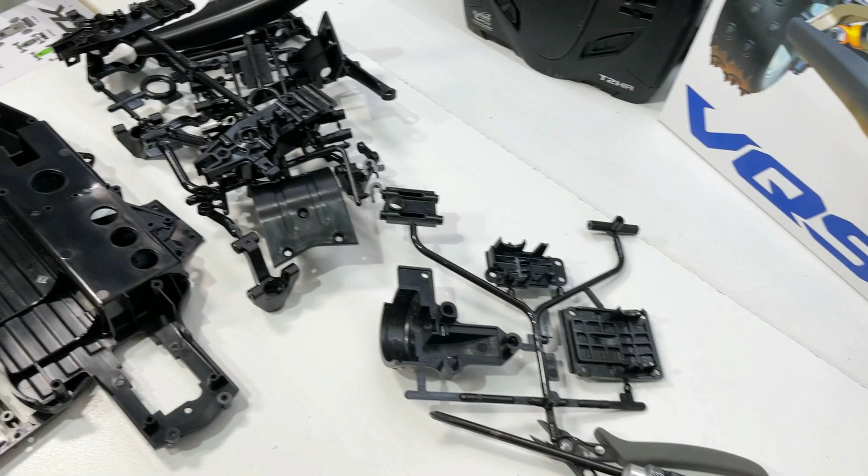Alrighty, so we got the VQS all unboxed there, got all the parts laid out, and I'll put the bags in separate tubs with the A, B, C, D on the front.

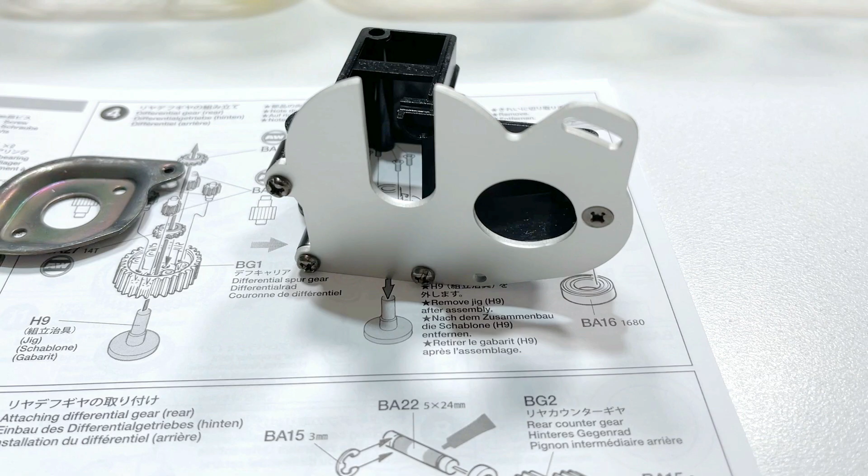So on to step one, we get to put the motor plate on. And there he is, just a few screws, too easy.

Now we're onto the motor. Got a bit of a decision to make - will I use the super stock TZ motor or the super stock RZ? I think I'll go with the RZ. Why, I hear you ask? Because it's going to match the red stickers on the car.

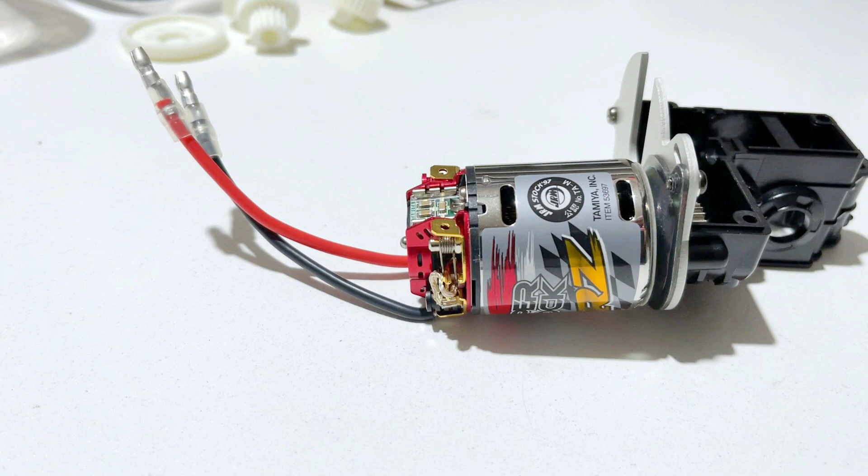Now the super stock RZ motor's all installed, looking very sexy. And we can get on to putting some gears in.

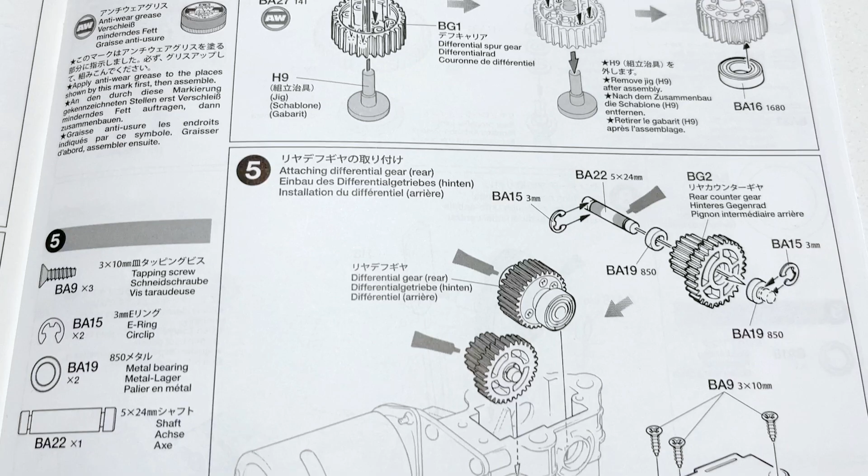So in step 4 we start with the rear diff. That's all pretty simple, and then move on to the counter gear and stuff, and the output shaft, or propeller joint.

Now in step 7, when you're building the center diff, you got to be real careful of these washers. Make sure they're all installed the right way. Basically they act like a spring, and of course they won't do that if they're not put in the right way.

And as you can see here, I've got the center diff in, and the diff gear and counter gear, just waiting on the bevel gear.

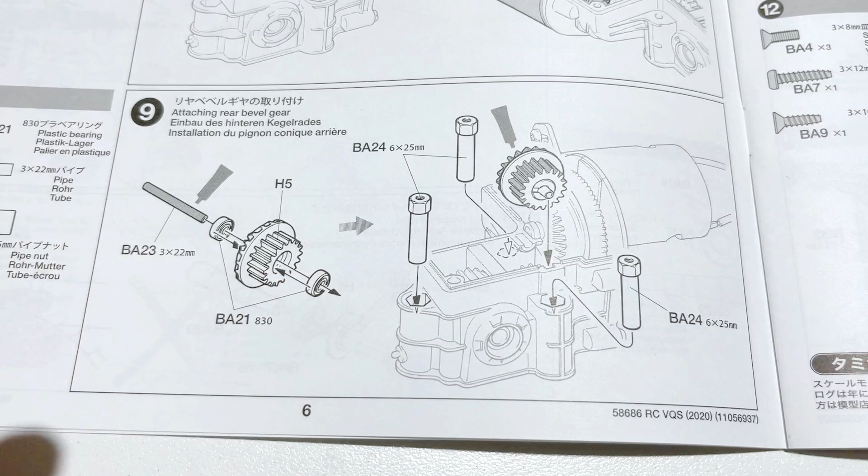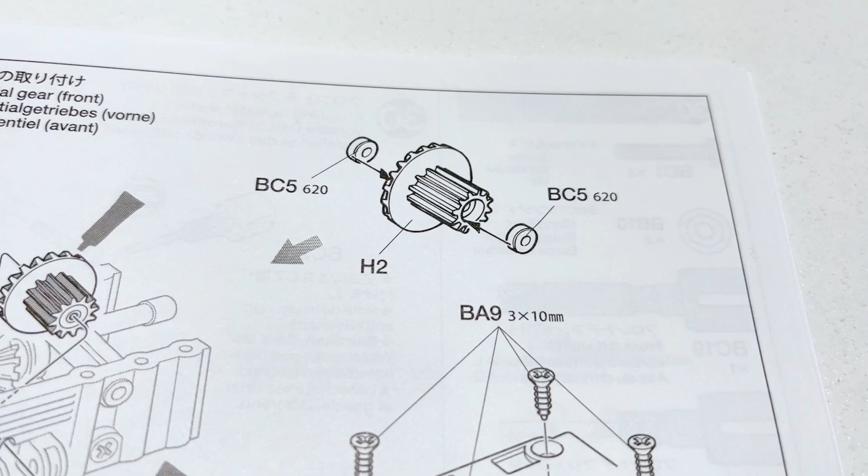Now moving on to the bevel gears. As you can see, I need these little 830 bearings to replace these plastic bushings. I didn't have them, and on the front bevel gear I didn't have the little 620 bearings, even smaller, for the front bevel gear. So I had to go and order them.

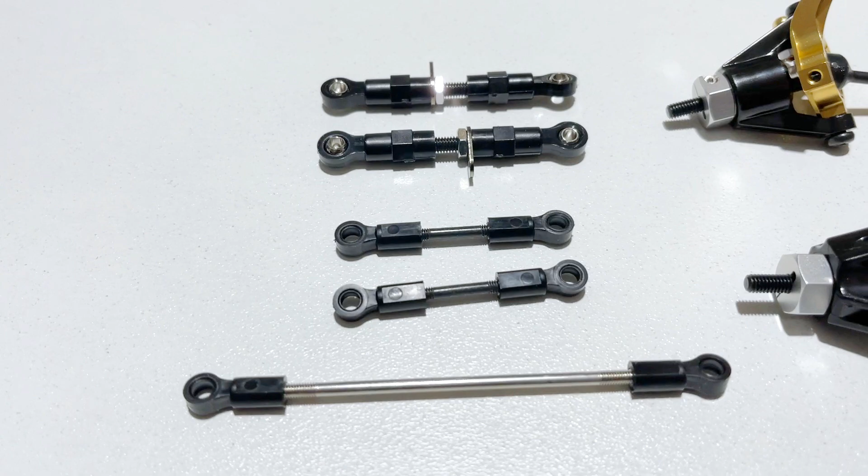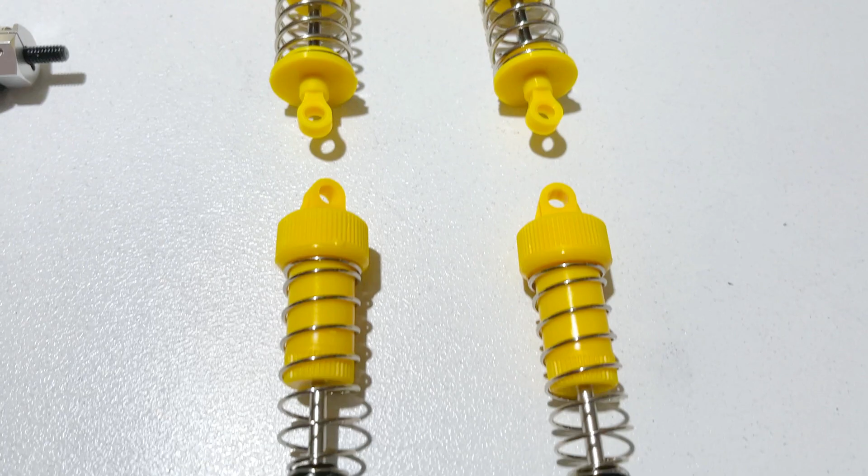Now while I waited for the bearings to arrive, I got onto the steering links and tie rods and things like that, and the rear arms, then the G11 part with the stabiliser on, also the steering and the gearbox cover there. Then I assembled all 4 CVDs and assembled the rear hubs and the front hubs, and then assembled all the CVA shocks. Alrighty, now the whole rear end's all assembled, got the shocks on and the bumper and everything. Now we can get onto the front gearbox.

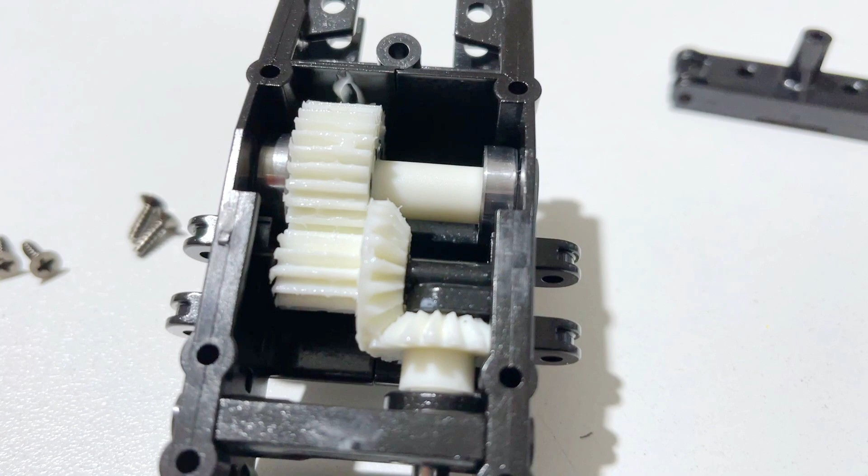So I've got the bevel gear in there, using the little 620 bearings.

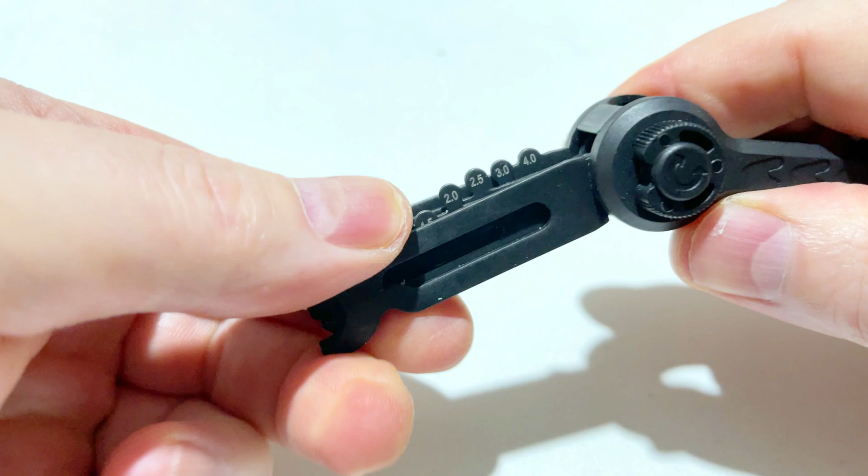Now it's time to put the front arms on, so I'll show you this little tool - it's going to be handy for the E-rings, little Dynamite E-ring tool. These cost about 25 bucks, probably a little bit easier than using pointy pliers most of the time. Anyway, you got all your sizes from 1.5mm up to 4mm. In this case we'll be using a 2mm.

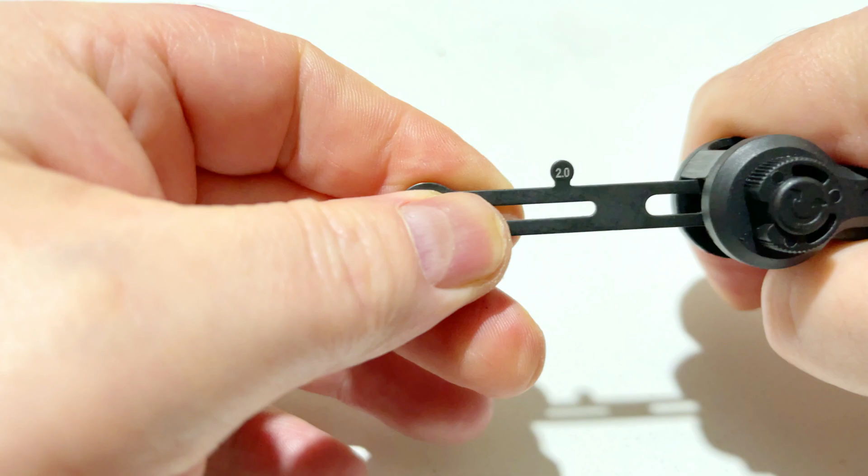So there's our little link pin there. That's the one we'll be doing. I've already done the others.

So it's pretty simple, you just put the E-ring in the end of the tool. And of course this one doesn't want to play nice because it's on camera.

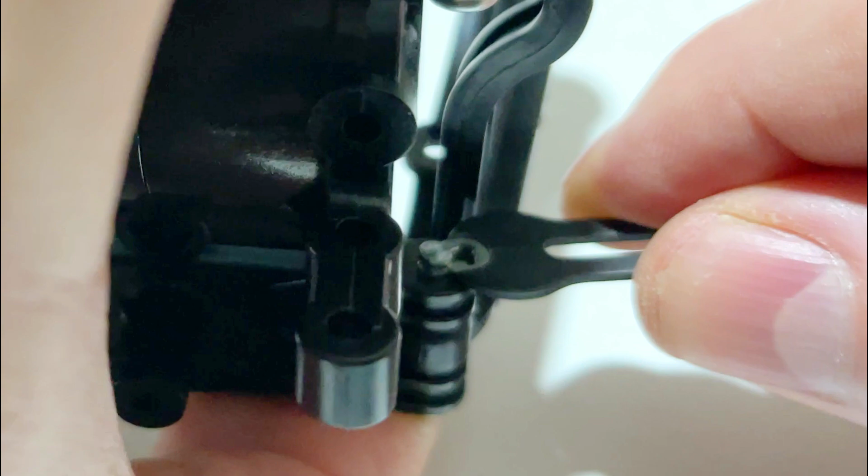Now I can grab the front end. Then we just line it up with the slot and push it on. I'll give it a bit of a wiggle. Again, it doesn't want to play nice being on camera.

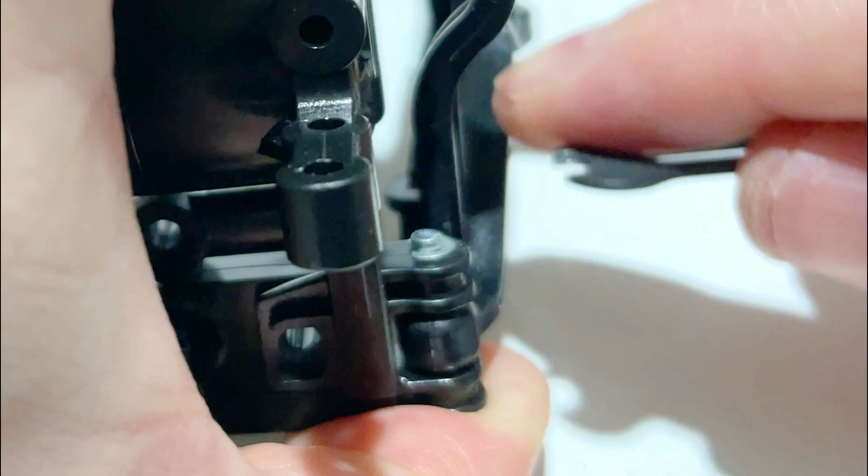And I find the bigger E-rings are better. The smaller they are, the harder they are of course. But yeah, big ones are easy as. It's just some different options.

Alrighty, got the front end all assembled there. Went together really nicely, nice and smooth. Got to be happy with that.

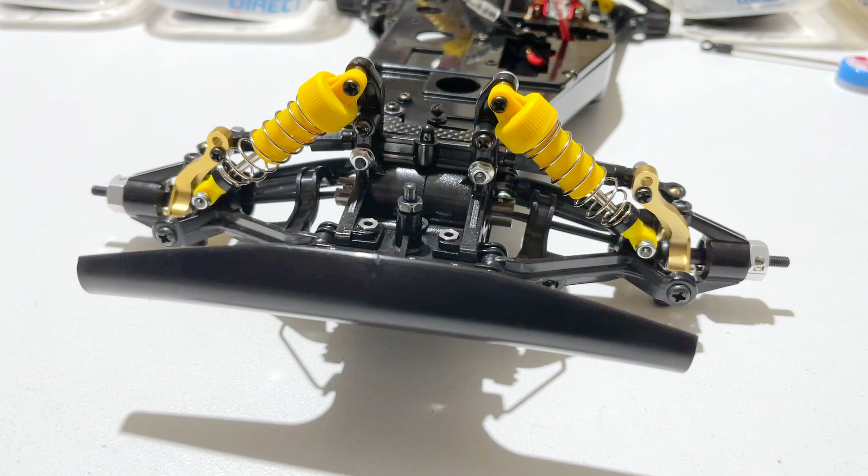And I've mounted the front end up onto the chassis there, and now it's starting to look like a real buggy. So now I can get on to fitting the electrics, but first I'll show you what electrics I'll be using in it. Alrighty, so the electronics I'll be using is the trusty old Futaba R202GF receiver.

They work quite well, and yeah, pretty compatible with like the T2HR transmitter, and my favourite, the 4PX, magnificent. So yeah, I can use whatever transmitter if I want, sticks or the wheel, whatever.

And for the servo, using a Power HD 3001 HB. So I'll crack that open, have a bit of a look. Pretty standard servo.

If I can get it out. Comes with all your bits, of course. So yeah, that's him. I've been using these in my builds for quite a while, and yeah, they do the job. They're reliable. Got to be happy with that.

And of course, I'm using the standard TBLE-02S speed controller that came with the kit. But I did put a Dean's connector on it, like I always do, because those Tamiya plugs are just crap. Alrighty, I'll get this all installed, and we'll have a look from there.

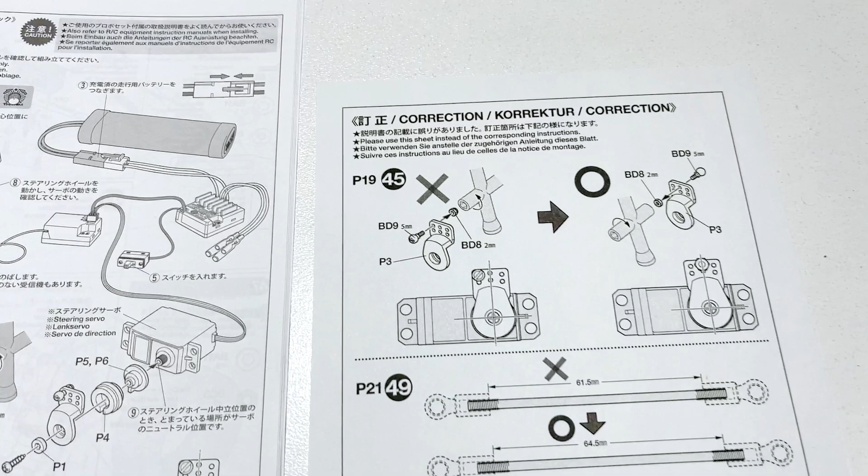Now, getting onto the electrics, there's a couple of mistakes. So Tamiya provide this spare piece of paper to correct it. Now, the first mistake is this little ball connector in step 45 on the front of the servo saver.

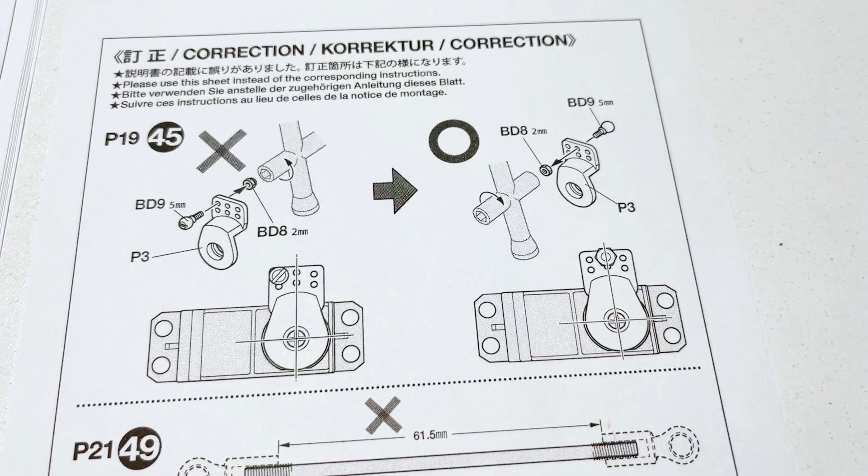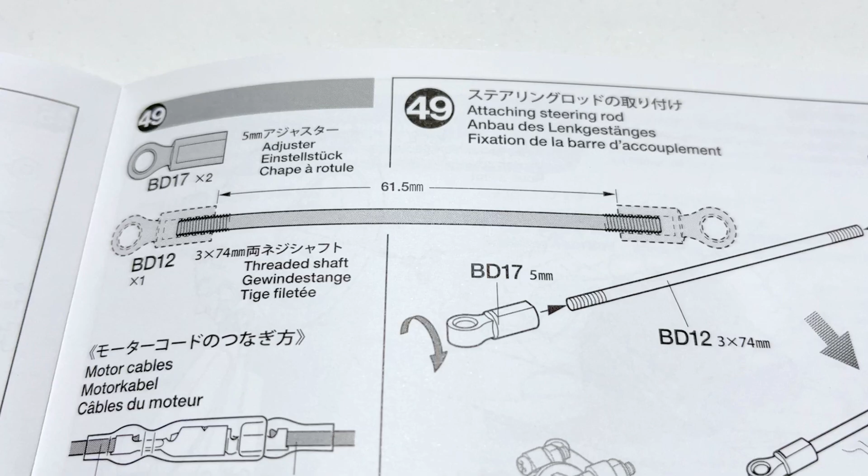It should be in the center of the servo saver, not on the left side, and it should be installed from the rear instead of the front. And the second issue in step 49 is this steering rod. The space between the ball connectors should be 64.5 millimeters, not 61.5.

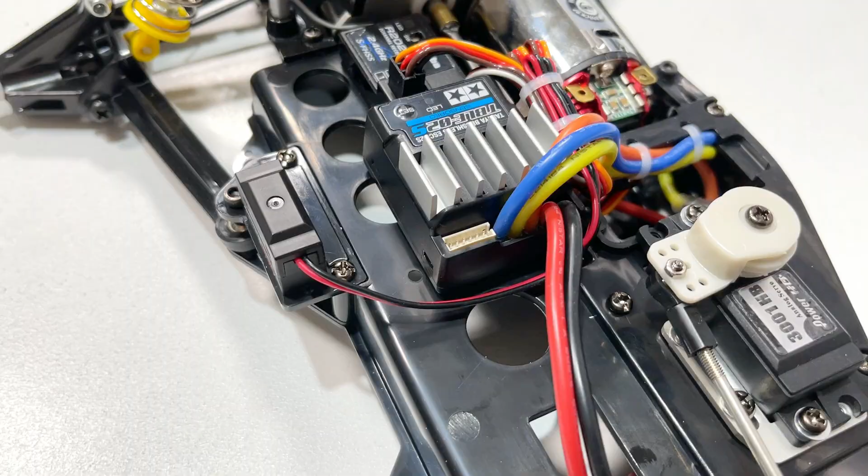Then it was time to fit the electrics. Now that the radio's in, the only thing left is to tidy up the wiring. And there we go, it's all tidied up. So I've sort of done my best to keep it away from the prop shaft and things like that.

And on the motor side, you can tuck the motor wires in beside the steering servo. It's all good. I think it came up pretty neat. So that's him. Got the wheels on him now and the tyres. Looking pretty sexy, I think. Very nice.

Bit of torque in that RZ motor.

So in the next video, I'll get onto that driver, get him all painted up, or finish it at least, and we've got the body and decals to go, and then hopefully we can get it out for a run, depending on these lockdowns. But maybe I'll give it a quick run in the front yard.

If I do that, I'll probably change the wheels to something, because on the concrete it'll just wear them out real quick. So maybe we'll get it out and have a bit of a blast, see how it goes. But yeah, pretty happy with it so far.

I actually like the simplicity over the Avanti, and the battery door much better. Yeah, the Avanti, you got to pull the link off there and take the body off and unclip this and that. Too hard. Anyway, well, that's about it for this video.